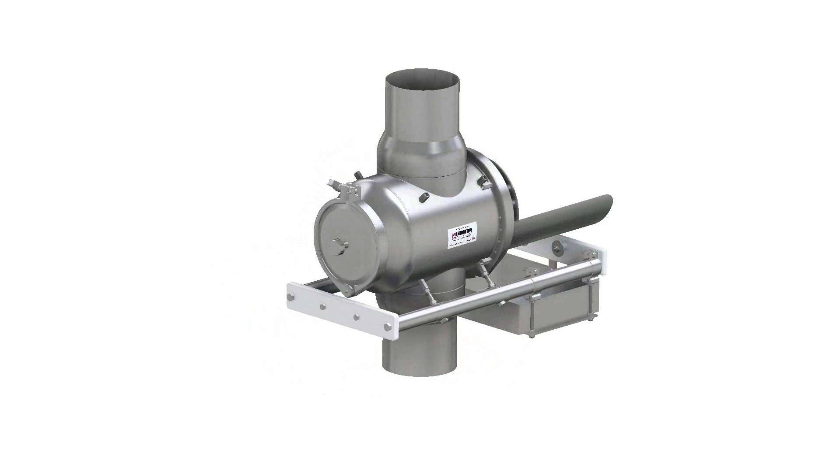This video will show you why Innovative Magnetics pneumatic and gravity magnetic separators excel. Innovative Magnetics magnetic separators utilize features no other separators offer. This view of the housing shows what we mean when we state direct product magnet contact.

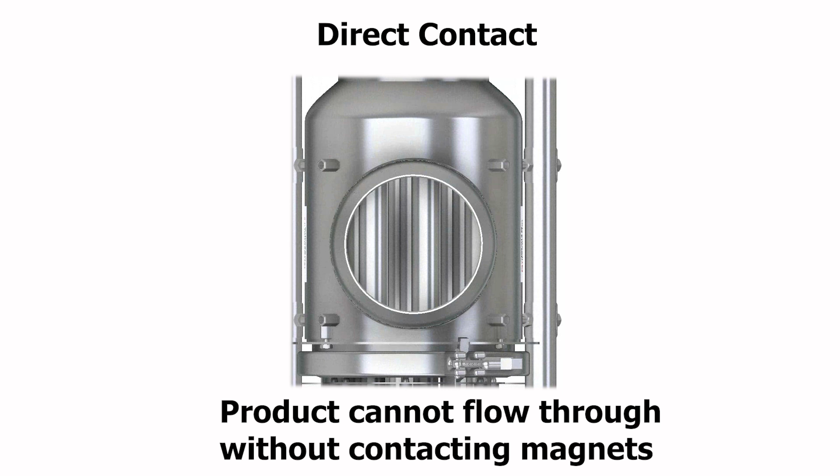Here we are showing the angled flow paths for product to flow through the pneumatic magnetic separator, plus magnet orientation for the product with or without iron enrichment. Also shown are the captured contamination areas, where captured contamination is protected from product flow.

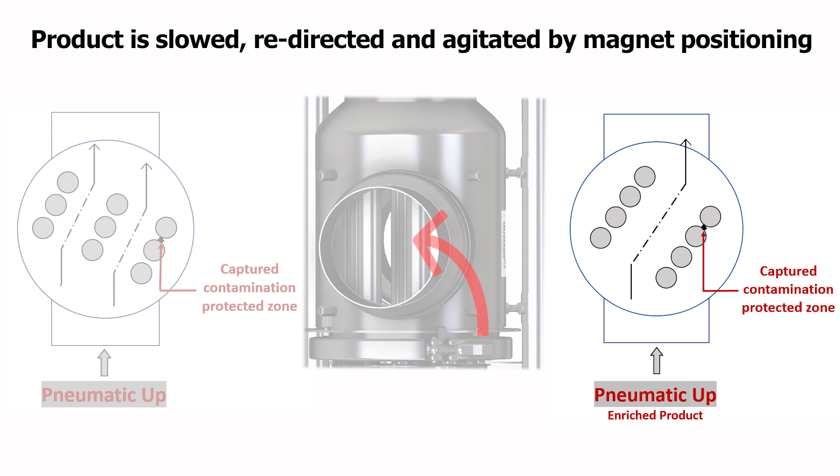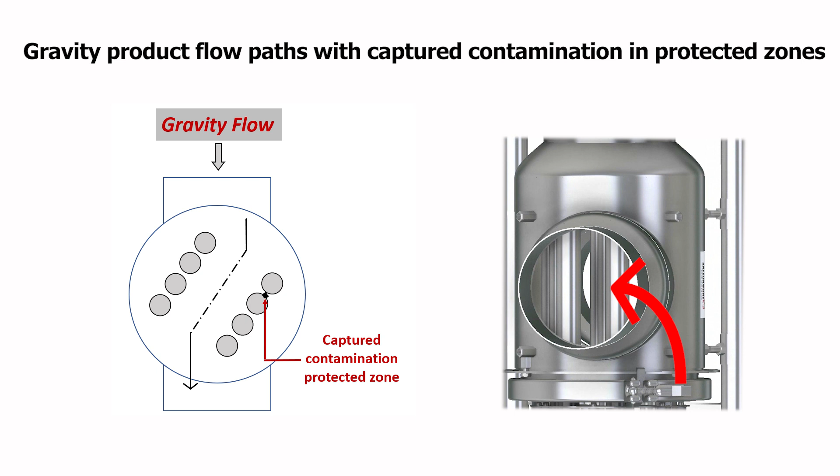The gravity flow direction of product is protected similar to the pneumatic magnet, with contamination protected the same. Flow path is widened, allowing products with lumps to easily pass.

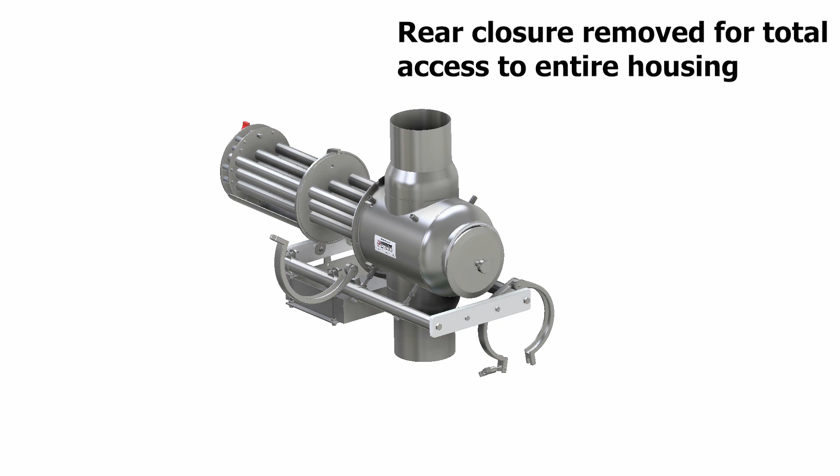Shown here are the operational features of the separators and the operator-friendly features we provide for, like easy contamination removal, magnet access, and housing design.

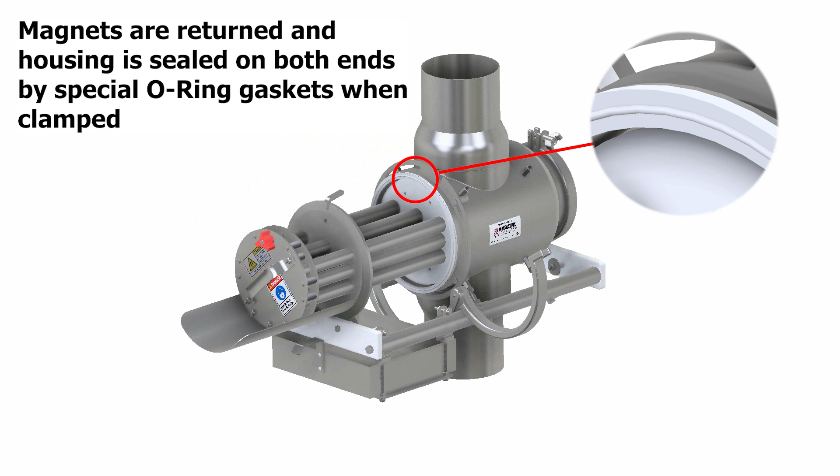Plus our special O-ring gaskets used on each end of the housing to prevent leaks from up to 40 psi.